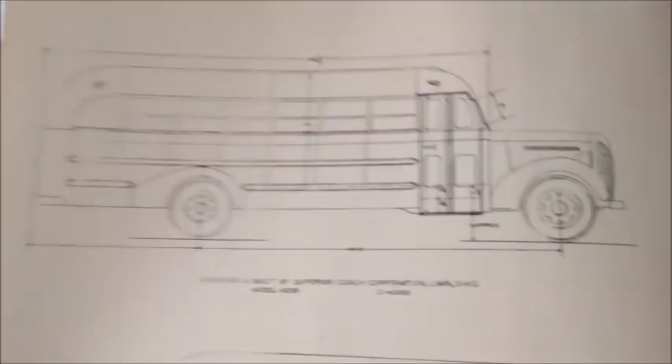So yeah, I also have the Superior parts book from, I believe it's 1946. I could be wrong on that. You can definitely tell it's a little bit older. There's a drawn graphic of one of the buses.

But yeah, there's the index, or table of contents. Pretty cool. And I'm pretty sure all of these diagrams are hand drawn, because yeah, they look to be hand drawn to me. So yeah, there's the Superior.

Going up, we have a bunch of Ward stuff. This is a Ward parts manual from sometime in the early 80s, I believe, as you can see from this GMC Ward.

And then we go back a little bit. I'm not quite sure on the exact year of this. You can see that Ward there. I love that body style of Ward.

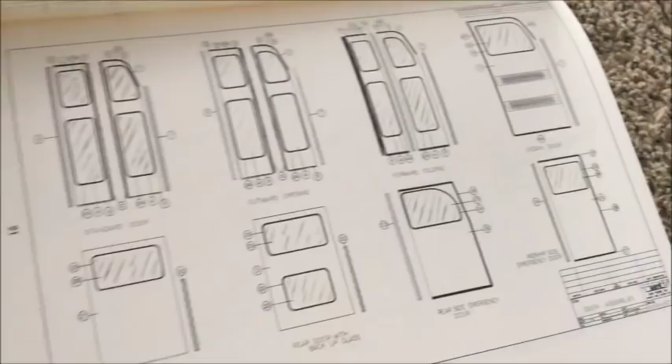Let's see if we can find any actual pictures of buses in here. I think it's just pictures of, like, here's a picture of all the doorways and stuff. And there's a body outline with a luggage rack on top. And then here's the rear cab. There was a body, let's see here. There's a good outline of the body.

I'm not sure. I'm pretty sure the listing was wrong, because when I talked to somebody about this after the fact, he was telling me the body was different. I think the listing said this was like '74. I don't know, oh well. So that's Ward.

And then I have this Ward parts book, which, as you can tell by the body, seems to be mid to late 80s. And it's also the Ward Volunteer. You can see more body-related things. There's back doors.

And this is when the blueprint, we'll say the blueprint of IC started to take shape, because as we know, Amtran, which Ward was sometime in the 80s, early 80s, was bought out, part of a government buyout or something, and they renamed it Amtran, but for some reason they still called them Wards, something to do with the family. I don't know, look it up if you want to know.

But anyways, you can see these windows in the back door, and the whole body is very pretty much the same as a first-gen IC or a late Amtran, because this was the first version of that.

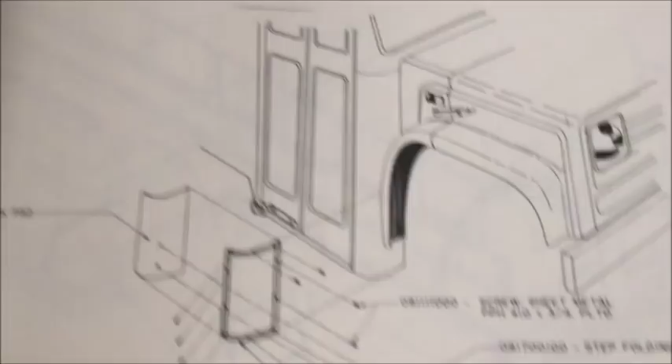So, trying to find more good pictures for you. Here you got a picture of what looks to be a GMC or Chevy. There's a school bus signs. So, yeah, that's the parts book.

Something's coming out, we got this fold-out, which is a wiring schematic. If I get that folded in.

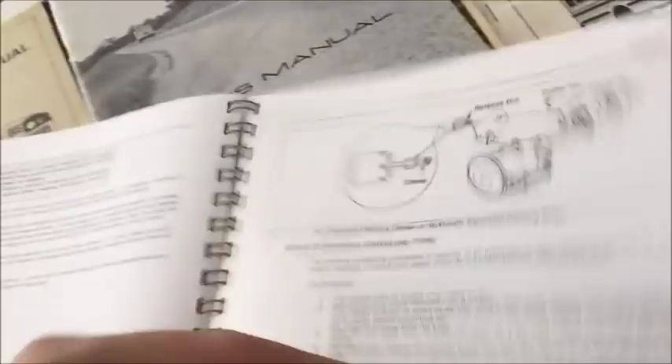Next thing is the Amtran RE owner's guide, which I have this obviously. You guys, I unboxed this on my channel forever ago. I'll include it, but yeah, it's just an owner's manual for an Amtran RE.

We got, if we go over here, we got some Bluebird stuff. We have a Bluebird body parts book from '78. You can see, I mean, this thing is really thick. Look, that's pretty thick. I think it's the thickest book here for parts.

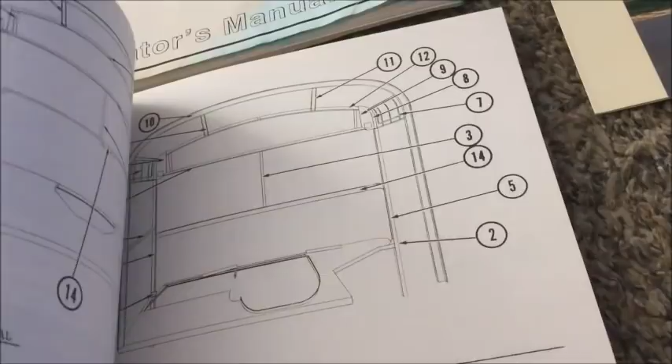I'm trying to find a picture of a bus to show you. Come on, there's a rear end of one. And then there's an All-American. Fun fact, this one is a bus from somewhere in Ohio.

And here's a Ford Bluebird. So yeah, and then we have this little 1977 conventional bus body operator's manual, which basically just, it's an operator's manual, so it's got pictures and stuff. Not too many really detailed pictures of the bus itself. You've got some outlines and stuff.

And then we've got this Bluebird Minibird sales brochure. I believe this is from 1980, 1981. You can see, I've had this one for quite a while. I don't believe I've done a video on it.

You can see. And then we've got this one, from sometime in the 60s, Ranger by Bluebird. So this opens up to reveal that. Pretty nice. And then there's a little thing from Albert.

We have that. That's pretty cool to see. I love in these old books when they show the body structure, especially in color. I don't know, I really like seeing that. For a book that's from the 60s, it's in really good shape.

And it's really colorful too, which I like. I don't know if you guys have ever seen this one, but it's just really cool to see these old, especially the old sales brochures. I've got plenty of them here.

Seats, and then here's back and front options you could have ordered on a bus, and side options and stuff like that. So that's the Bluebird one from the 60s, and then there's the back.

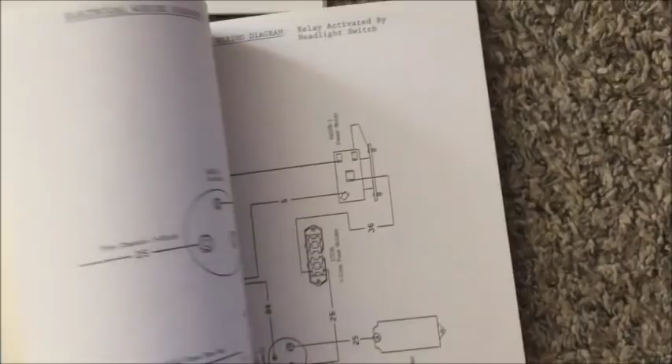So if we go up here, we've got a Wayne operator's manual for the Lifestar, Lifeguard, and Chaperone. I don't think this has any really good pictures of the buses. I think it's just got wiring schematics and stuff like that, and little pictures of the doors and stuff.

And then I have a Wayne Lifeguard parts book. Obviously I need that for 3. This book has been really helpful, just to see parts and stuff that I'm going to end up needing for 3. Let me move some of this stuff out of the way.

And then we have the International 3000 Series chassis brochure. This one's pretty cool, it's got a little mailer still with it. Now this Thomas has an interesting thing with the mirrors here. I've never seen the mirrors mounted on the side of the hood like that before, so I'm guessing this is just a prototype that they tried when they first released the 3000 series chassis.

So there's a little chassis and then body, and then just more pictures. They only use a Thomas in this for some reason. So yeah, more of the mirrors mounted on the side of the hood. And look at that big stop sign. So yeah, that's pretty much that one.

You guys have all seen the Step Up to International School Bus Chassis, the Loadstar. I've got that video, I will link it. There's all kinds of stuff. Yellow Superior.